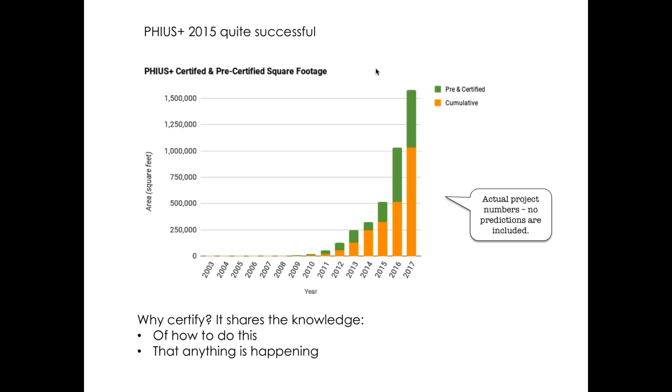So on to Phius Plus 2018, and there's two main parts to this. I want to talk about the changes to the certification criteria, and there are three aspects to that. There's changes to the heating and cooling, changes to the source energy criterion aimed at getting to zero, and some changes to the quality assurance. And there's also a couple of significant changes to the calculation methods that I want to touch on.

But before I get to the changes, let's review what stays the same. We're still wanting this to be a passive building standard, which means that it structurally prioritizes the use of passive measures in building construction. And the way we do that is we have limits. We put limits on the modeled heating and cooling loads in both the peak design load and the annual demand sense. And the connection there is that that's kind of what passive measures do. That's what they're good for, is reducing the heating and cooling.

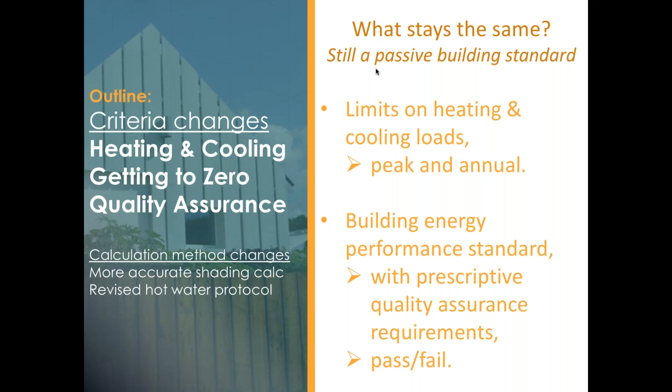So still on the review here of where Phius Plus 2015 was coming from. The approach we took to setting the heating and cooling was that we wanted to base that on economic feasibility. So there's the question when you're investing in passive measures like air sealing and windows and insulation, how good is good enough? When do you stop and start looking at other kinds of energy saving measures, mechanical equipment or renewables?

And so to determine the appropriate performance levels that were economically feasible, we went to economic analysis, and that's a life cycle cost type of analysis.

But we imposed some constraints on that optimization. In particular, we put in our study buildings that they had really good windows to make sure that we weren't compromising comfort, for one thing. And so those targets, those heating and cooling targets, are then sensitive to climate factors.

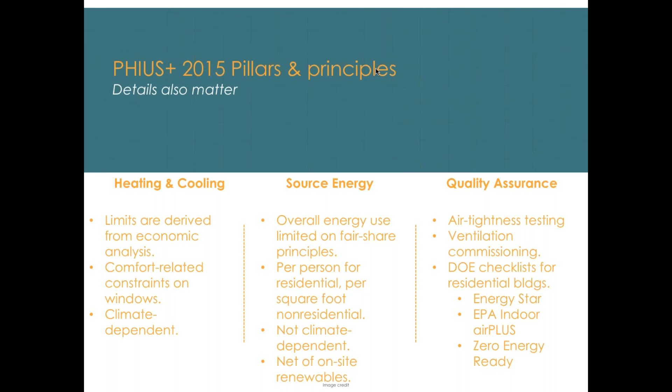So for 2018, on the heating and cooling front, having based our heating and cooling criteria on economic analysis and on a cost structure for energy saving upgrades, we essentially signed up to update that in case costs change. And some costs have. Window costs have come down, for example. So we need to update for that.

But mainly, this time around, what we're putting our effort towards is making the criteria sensitive to different occupant densities in the building. That has quite an effect on the balance of the heating or cooling that's needed in the building. And the other thing that affects that is the building size, kind of the envelope to floor area ratio.

And so what we're looking at doing is having a categorical difference between small and large buildings, and within those categories, some continuous adjustment for occupant density and for the size of the building. And in the course of our life cycle optimizations, we're going to extend the analysis period. It was 30 years for Phius+ 2015, and we're going to extend that to 70 years, which is more realistic for a total building life.

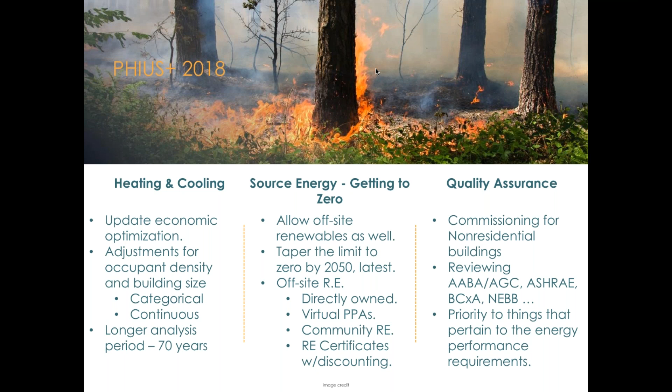Trina, how's my sound? Can people hear me, do you think? I can hear you well, and no comments have come in to the contrary.

Okay, great. All right. So let me talk timeline for just a second here. We are running a bit behind, and that's mostly my fault. But by the end of this month, like in a couple of weeks here, we're going to publish our pilot phase protocol and open it up for public comment. A couple of weeks later, the comment period will close. We will then take some time to assess the feedback, finalize the protocol for the pilot phase, and open the

program for submissions. And so for PHIUS+ 2018, only WUFI Passive models would be accepted, mainly because of these calculation method changes that we're looking to do. So the pilot phase runs for 6 months. That will end in September of 2018, and at that point we'll publish the final protocol, but we'll continue to certify. So there'll be a phase-in period where you could submit under either PHIUS+ 2018 or PHIUS+ 2015 programs.

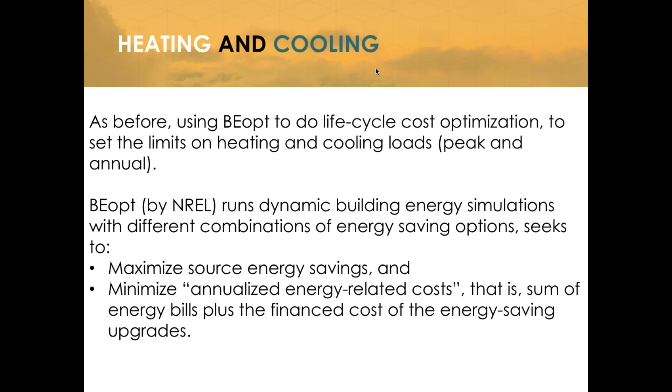So yeah, if you have upgrades that are really cheap, you can save money over the project analysis period. But other upgrades may be more expensive, and even if you spread out the payments on them, you're paying more every month than what the energy savings is. So those are less desirable. So here's kind of an example of what's going on. We're still in the process of running the simulations to determine these targets. This one was running yesterday. It happens to be a small house in climate zone 4B.

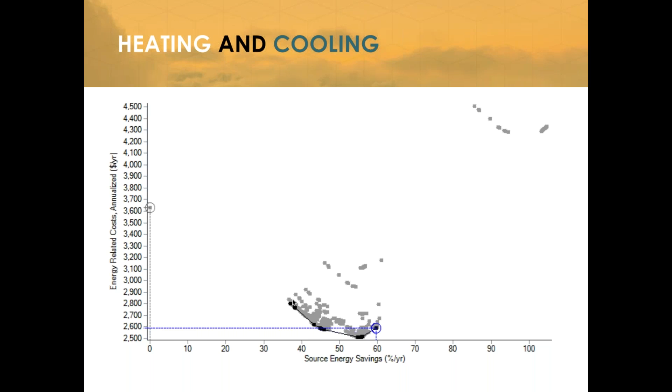A slight difficulty or disconnect is that it's great that we're using the state-of-the-art calculation engine that's built into BEopt to do these detailed studies, but we don't certify with that software. We certify using WUFI Passive. So having picked this study building and its upgrades configuration, then we have to remodel those in WUFI Passive to see what the heating and cooling loads could come out to be under our calculation protocol.

And there are some significant differences there in some cases. So we want to make sure that this is tuned to our certification protocol, so we have to do this crossover. Then, once we have that data set, we do some curve fitting on it to set the rules for how the heating and cooling criteria work, what the sensitivity to the occupant density and the building size would be.

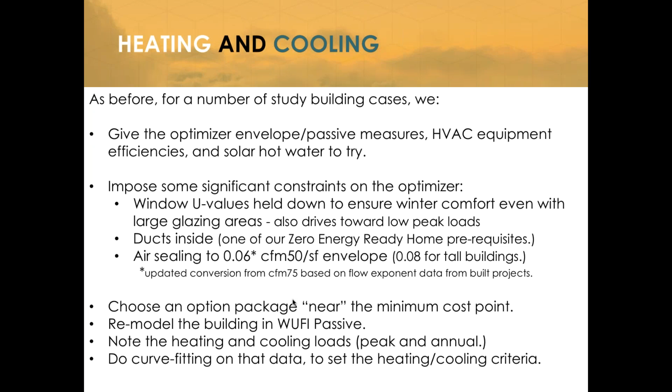So that is all pretty similar to our procedure from 2015, but some differences are that the 2015 development was really focusing on climate factors. We had one study building, and we looked at a lot of different climates to come up with targets that were sensitive to several climate factors, not just average temperature, but the peak design temperature and the design humidity ratio and the solar access, all this stuff.

For 2018, for the pilot phase, we're really more interested in these sensitivities to building size and to occupant density. So we're going to focus our calculation resources on that to start with. So the climate sensitivity aspect of it will drop in the pilot phase to a zone by zone set of rules. We're more interested in getting feedback on the adjustments for occupant density and building size, so we're looking to have a more nuanced set of rules on that.

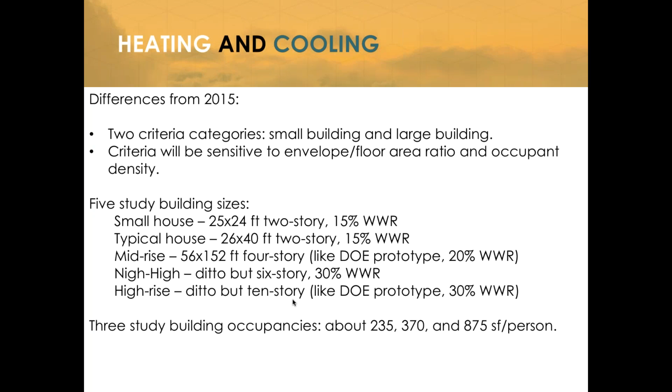Within each of those, we look at 3 different occupant densities, which correspond to about 235 to 875 square feet per person. And that again is about the total range that we see in certification, and it corresponds to kind of the upper and lower quartiles in the housing census data for multifamily.

So here's just a visual of what those buildings look like, and they're still not even to the same scale. So that little house is 25 feet wide, and the 6-story there is 56 feet wide. Okay, so that's the story on the heating and cooling.

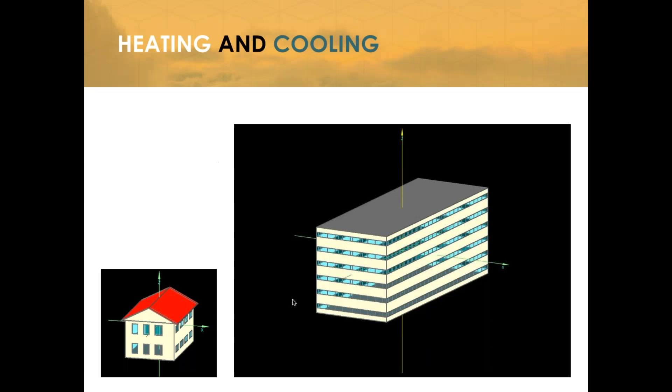So moving on to the source energy criterion, I won't go through this in detail, but I think I'm doing my math correctly here on this kind of fair share calculation. Kind of the bottom line there was in 2015, we were working with this source energy limit of 120 kilowatt hours per meter squared, or 38 kBTUs per foot squared of source energy.

We wanted to look at that through the lens of the global carbon budget and see whether that global carbon budget would allow any relaxation of that limit. Essentially, the answer we came up with is no. That's about right for the current year if you're looking to taper to zero within 30 years or so.

So we determined that current year, the year 2015 source energy budget for the building sector was plausibly about 4,200 kilowatt hours per person. And that assumes buildings are going all electric, but it's supplied by mostly non-renewable generation.

We found that we had to relax that limit because we also wanted to be more realistic about the amount of energy that's used for residential lighting and plug loads, and that was an increase from what we were assuming before. So we had to basically relax the source energy limit, but we said even at the time that we wanted to ramp it back down to 4,200, and ultimately what in fact has to happen is that the use of all this non-renewable generation should taper off to zero.

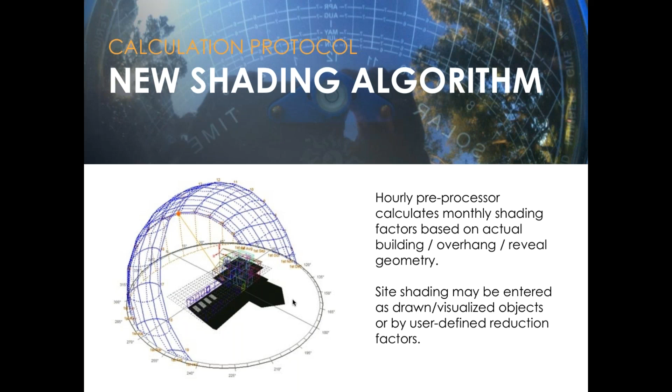So all you have to do is actually draw the building geometry, the overhangs, and it figures all that out. So it's no longer necessary to put in reveal entries or overhang entries, although you will still be able to do that to use the more simplified methods. So we think this is an improvement in accuracy on the passive solar front.

Also, we're going to make some changes to the hot water protocol. We've got a couple of issues here. Having adopted the EPA WaterSense requirement on the delivery time for hot water, one of the things we need to do is allow people to do some design calculations to see if they're likely to meet that field test. So that's part of it.

And related to that, another pipe heat issue is that our current algorithm for calculating the heat losses from the water pipes doesn't scale very well to large multifamily buildings. So we're going to fix that, and we're going to align with RESNET on some other things like drain water heat recovery and how the energy for washers and dryers is accounted for.

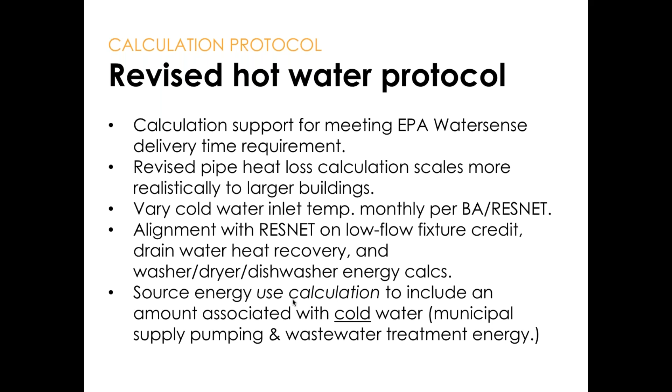And so for a bit more, just a few final details on source energy use then. We want to include in the source energy an energy associated with all the water use, with pumping all the cold water to the building and the wastewater treatment, kind of a nominal number for that, because that's also an energy impact on society.

And so we get questions fairly often about the multiplier from site to source for grid electricity, and we're sticking with national average on that per the Energy Star Portfolio Manager. You know, in my personal opinion, again based on this common atmosphere idea, any emissions anywhere affect everyone everywhere. And likewise, the benefit of a renewable energy system that's deployed benefits everyone everywhere a little bit. So in my view, we should be using the world average source energy multiplier for everything. But I got talked into national averages, so at least we have national solidarity at that level.

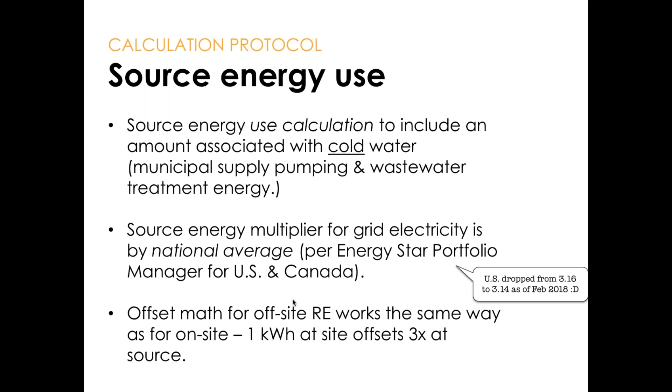And the needle moved a little bit. We checked the Portfolio Manager, and the source factor for the U.S. dropped by 0.02. So yeah, on our way to decarbonization. So at this point, we're ready to see what the questions are.